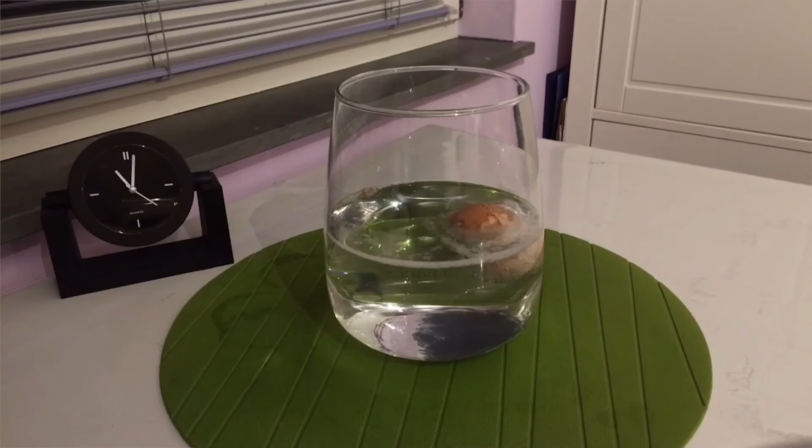To demonstrate how much effect an environment can have on a material, I will show you a small experiment. A raw egg is put in vinegar of about 9% solution. Leaving it overnight, you can slowly see the eggshell react with the vinegar.

If we take the egg out of the vinegar, the hard shell is gone. It reacted with the vinegar. Only the squidgy egg sac and the raw egg inside are still left. So, what does the environment do to aircraft and spacecraft structures and materials?

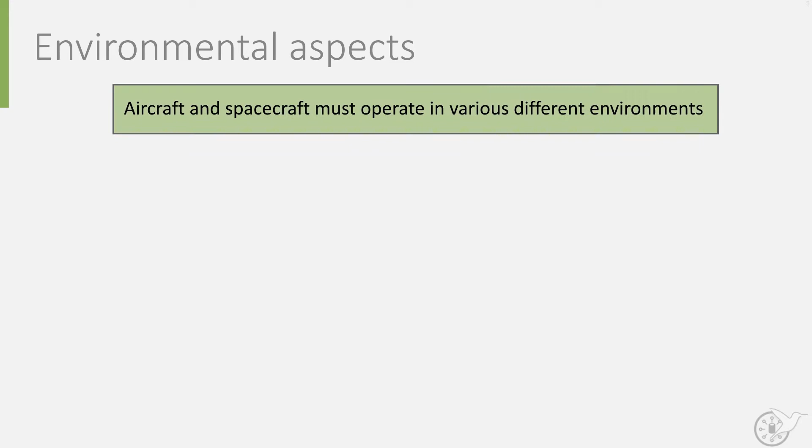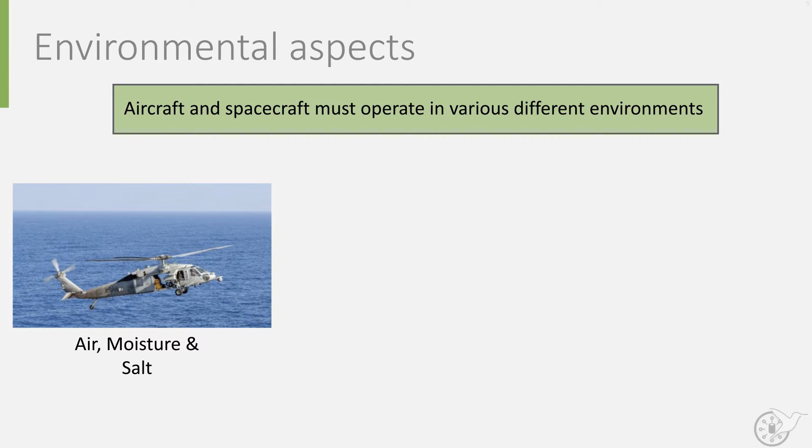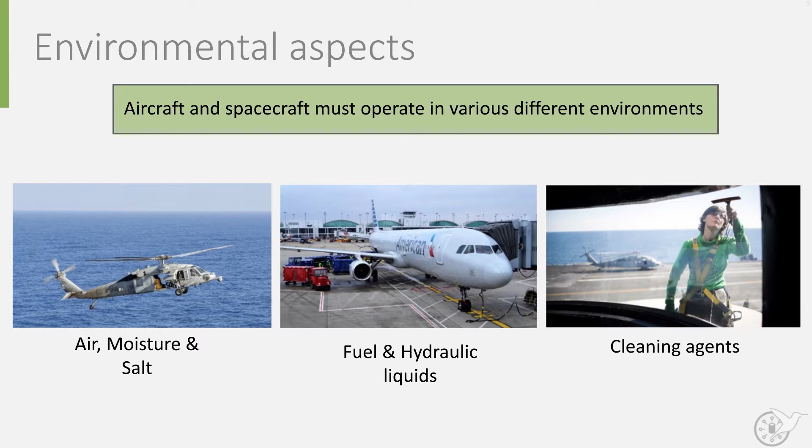Aircraft and spacecraft operate in many different environments, each of which has its own effects on the materials we use. You can think here of a helicopter operating search and rescue missions over sea, meaning that the air is filled with moisture and salt. Aircraft structures tend to also hold fuel and hydraulic fluids in tanks and aircraft systems, and, as strange as it may seem, every now and then aircraft and spacecraft also need a good clean.

So let's zoom in on a helicopter in a saline environment. For most metal alloys, the combination of moisture and salt forms an aggressive environment that leads to corrosion. Corrosion is an electrochemical reaction that metallic atoms have with oxidants and can be accelerated by the presence of water.

This makes corrosion a real issue in metals and can lead to disaster, as was the case for the ill-fated Aloha Airlines Flight 243 that lost part of its upper fuselage during the flight. Here, the cause was determined to be a combination of fatigue, due to the many short-distance flights, in combination with crevice corrosion caused by the aircraft operating in a coastal environment.

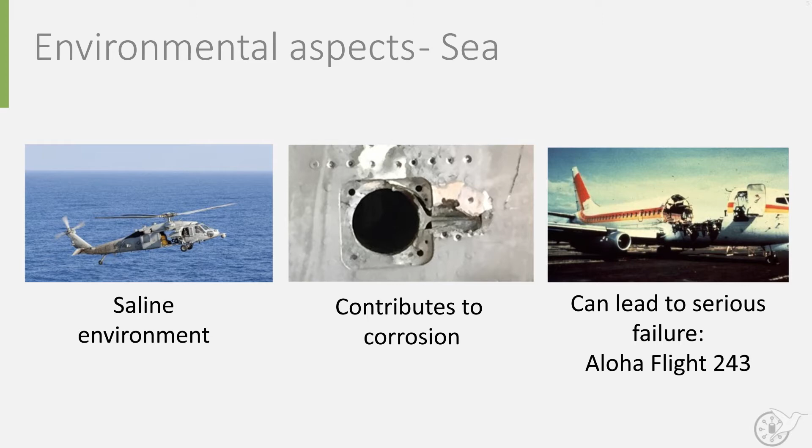Miraculously, only one person aboard this Boeing 737 died, and the aircraft was able to land safely. As a result of the investigation, structural and material design changes were made to the 737. Other environmental factors to consider, especially in space, are radiation and ultraviolet or UV light exposure, atomic oxygen and vacuum.

In the outer atmosphere, free radicals, and especially atomic oxygen, have a large effect on the degradation of materials. Some materials, such as aluminum, erode slowly, others, such as platinum and gold, are highly resistant. Polymers, however, do not do well in this environment and require the application of, for instance, silicon-based coatings to shield them.

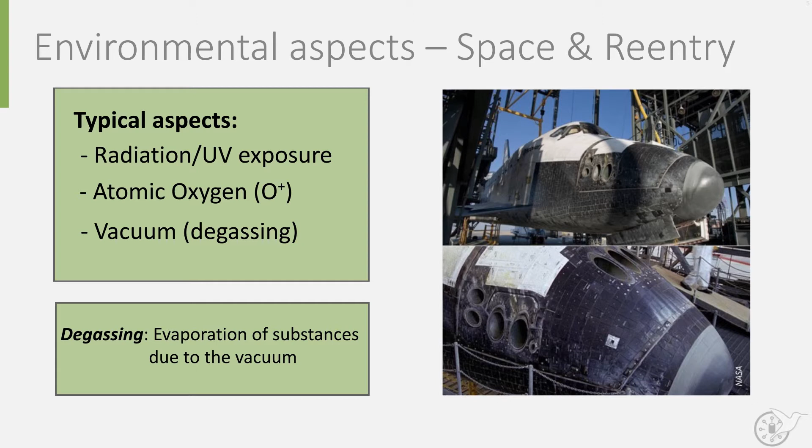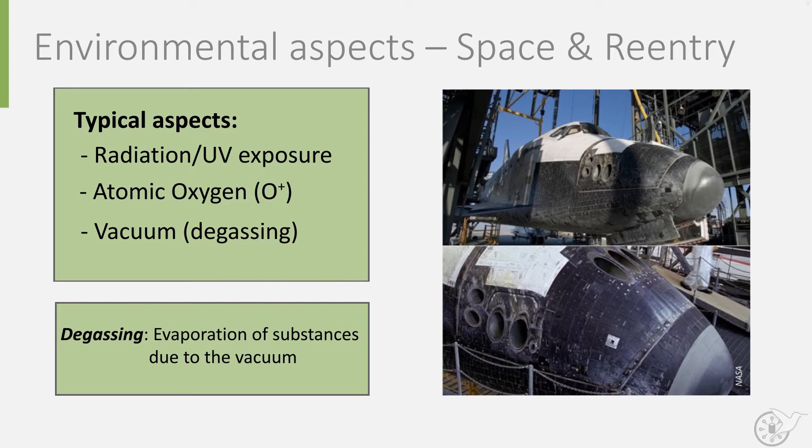In vacuum, degassing can be an issue. This is the phenomenon that substances evaporate due to vacuum. Many materials, such as composites, adhesives and polymers, contain substances that can evaporate. Even metals may release gases from cracks or impurities in the metal. This has an effect that, over time, the material properties may deteriorate.

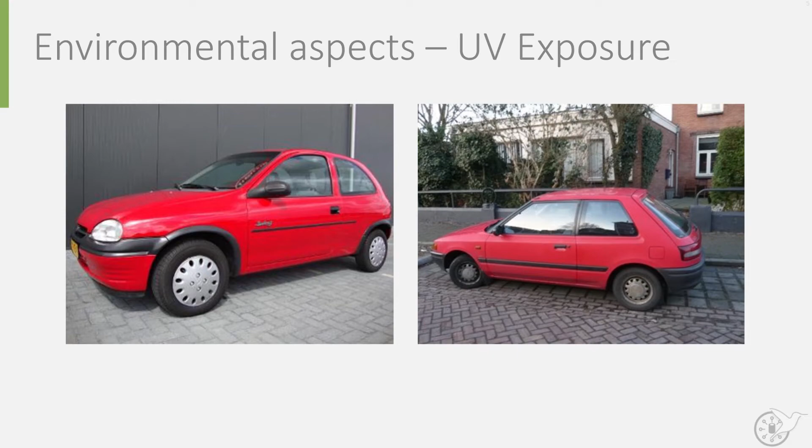The effect of radiation and ultraviolet light can also have a deteriorating effect on materials, especially on natural and synthetic polymers. Take this car, for instance, that has lost its shine by UV radiation of the sun. It is worthwhile to note that Kevlar, such as used in bulletproof vests, and aramid fibers are also sensitive to UV radiation.

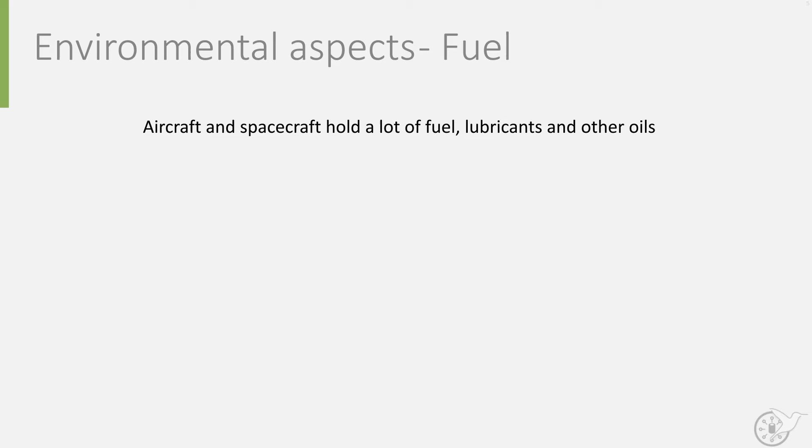Aircraft and spacecraft tend to also hold a lot of fuel, as well as oil and other lubricants in the many systems, such as the landing gear. If an aircraft has an integral fuel tank without an additional fuel bag inside, as is the case here for a Hercules C-130 transport aircraft, all joints and connections are sealed air and liquid tight.

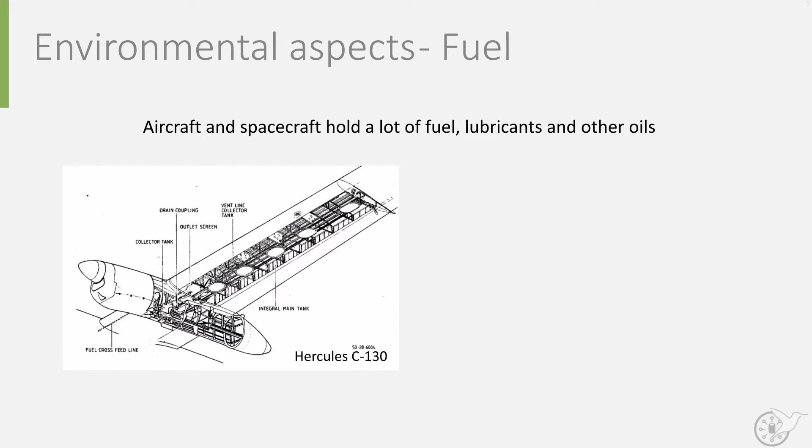To avoid the fuel affecting the structure, great care should be taken to ensure that the material is resistant to chemical components of the fuel or that coatings are used. Also, care must be taken that the sealants used do not act as enablers for undesired chemical reactions that may affect the materials.

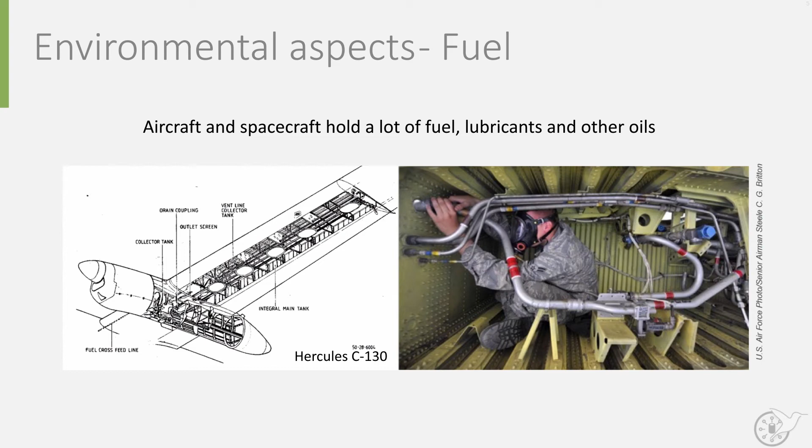When operating and maintaining aircraft, it is also important to consider the effect of chemicals used. De-icing, which is essential to ensure the aircraft can safely take off, can be done mechanically or thermally, by warming up the propeller for instance, but it's often done using chemicals. The same goes for cleaning aircraft. Using the correct chemicals and applying them correctly is vital for safety.

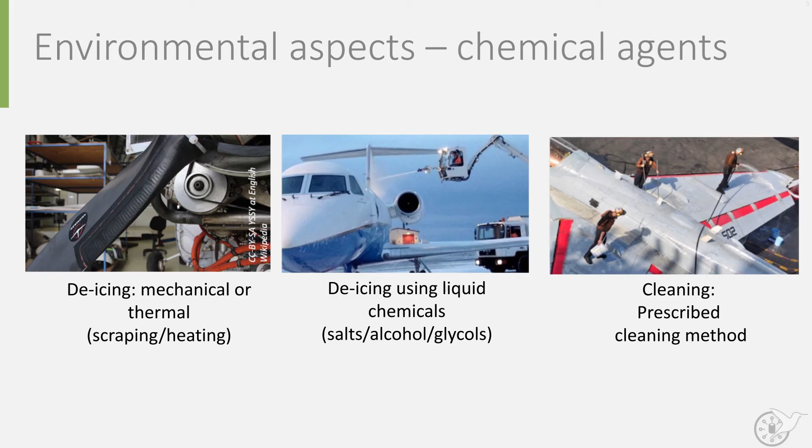Over time, aircraft will corrode, just like many objects in life. It is important to realize, however, that this process can be slowed down or avoided by picking the right materials. And, to speak with the words of the great Dutch soccer legend Johan Cruyff, every advantage has its disadvantage. Realize there are pros and cons for every material choice or structural solution you choose. For instance, metals are more likely to corrode, but polymers are more susceptible to UV radiation.

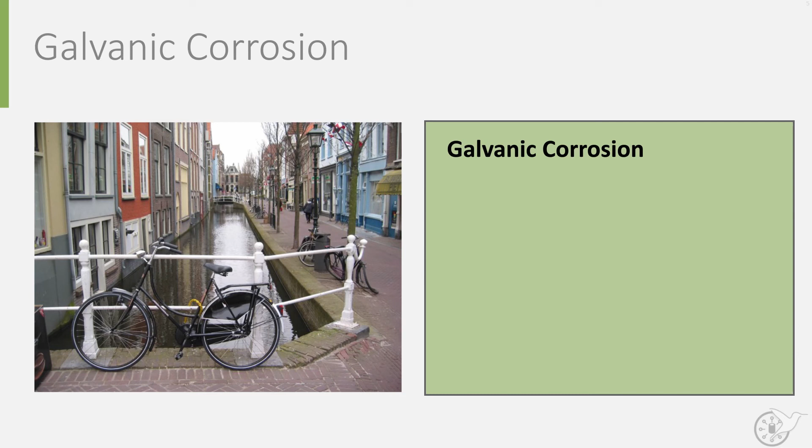Before I go, there's one more type of corrosion I'd like to highlight: galvanic corrosion, using a typical Dutch mode of transport, the bicycle. In winters, bikes are exposed to mud, water and road salt. Because the bike wheel is made of different materials, one material corrodes due to its contact with another material or metal, similarly to how batteries work. In our case, the brass spoke nipple reacts with the aluminum rim.

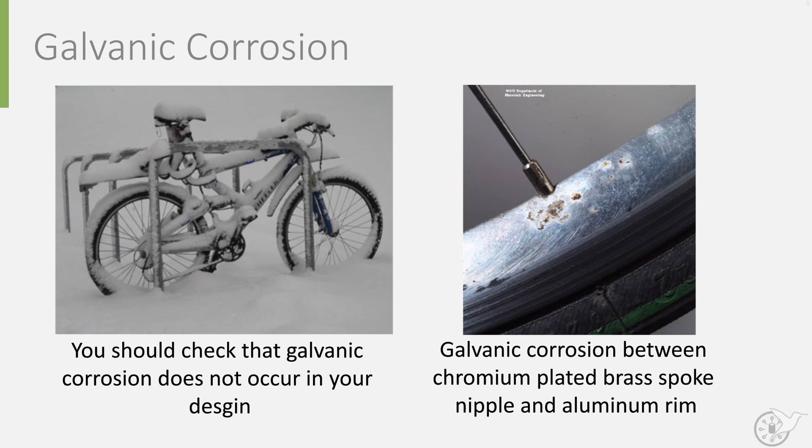You should check that this galvanic corrosion cannot occur in your design. Please realize that it is not limited to metal contact. An electric potential difference can also occur between a metal and another material. If it cannot be avoided, one must try to isolate the materials from each other or avoid the immersion in an electrolyte.

Finally, sometimes clever use is made of galvanic corrosion by deliberately placing material in a structure where it is sacrificed to protect another material. Zinc is often used in marine structures as such, to protect steel.